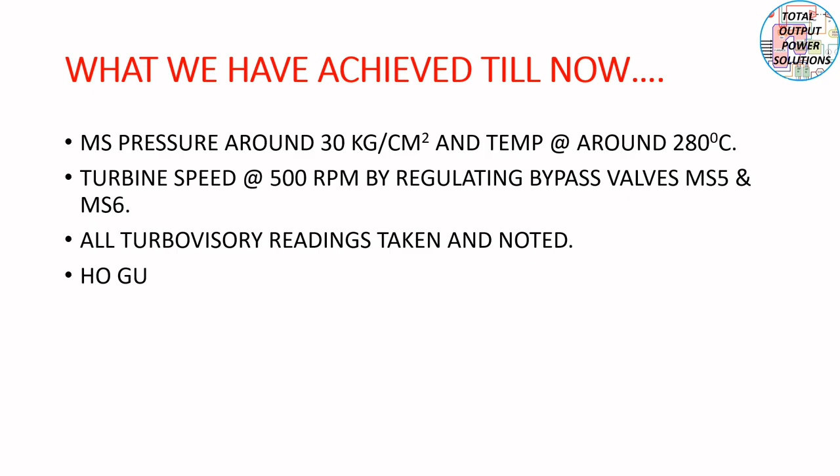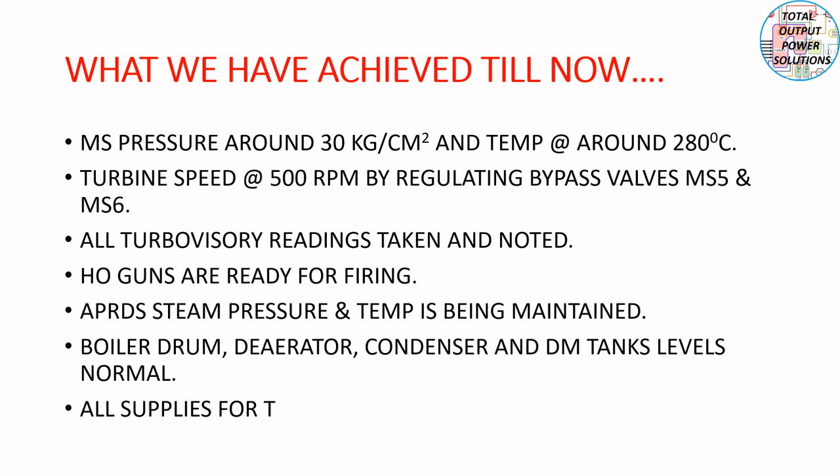Now all turbovisory readings have been taken and noted. The heavy oil guns are now ready for firing. The auxiliary PRDS steam pressure and temperature is being maintained. We constantly check this. Then boiler drum, deaerator, condenser and DM tank levels are normal. Now all the supplies for the CHP auxiliaries also are to be made ready, as we are going to take the CHP in service immediately after rolling.

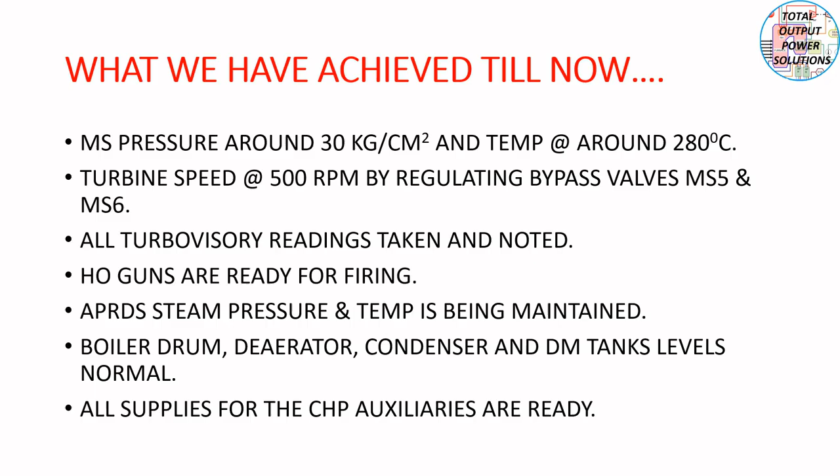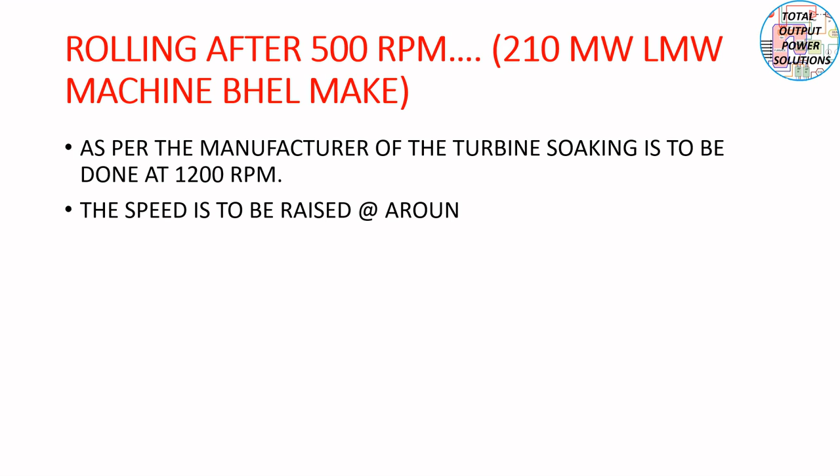The rolling after 500 rpm, we are doing it for 210 megawatt LMW machine by BHEL. As per the manufacturer of the turbine, the soaking is to be done at 1200 rpm. The speed is to be raised at around 40 to 50 rpm per minute. The critical speeds are at 1585, 1881, 2017 and 2489 rpm. Hence, we are not supposed to stop at these speeds and pass them over quickly. You can observe the eccentricity and vibrations at critical speeds.

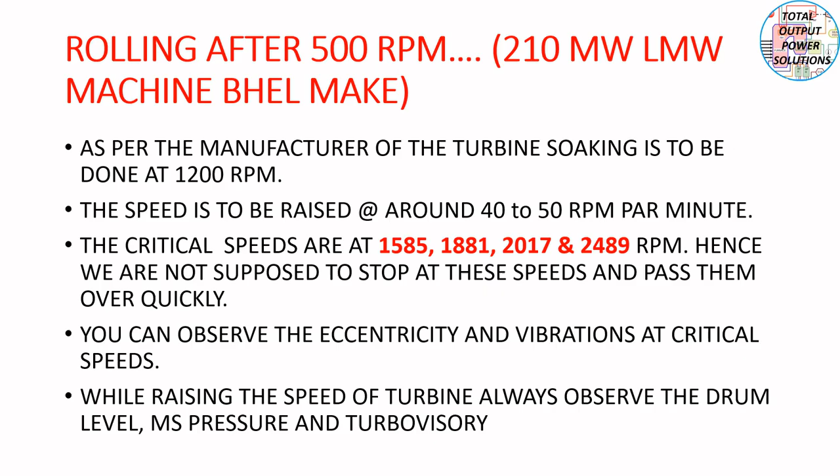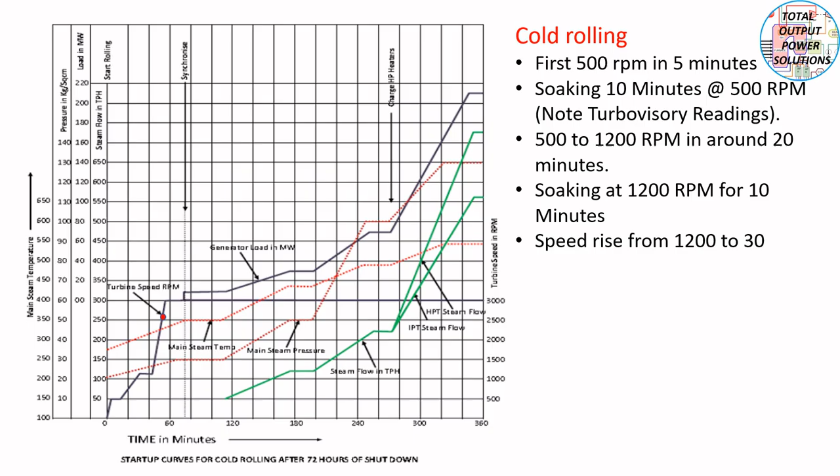While raising the speed of the turbine, always observe the drum level, boiler drum level, main steam pressure and the turbovisory, specifically eccentricity and axial shift. The diagram as per the chart that has been supplied by BHEL, the manufacturer, for cold rolling is something like this. You can see here the first 500 rpm you have to raise in just 5 minutes. Then there is a soaking time of 10 minutes approximately. This 10 minutes is generally for taking turbovisory readings at 500 rpm.

Then you can move on from 500 to 1200 rpm in around 20 minutes. Then again we will be soaking the turbine at 1200 rpm for around 10 minutes. It will run continuously on 1200 rpm. The speed rise from 1200 to 3000 rpm, we are raising the speed directly, and we are not stopping at critical speeds. The critical speeds are 1585, 1881, 2017 and 2489. This we are doing in 10 minutes only.

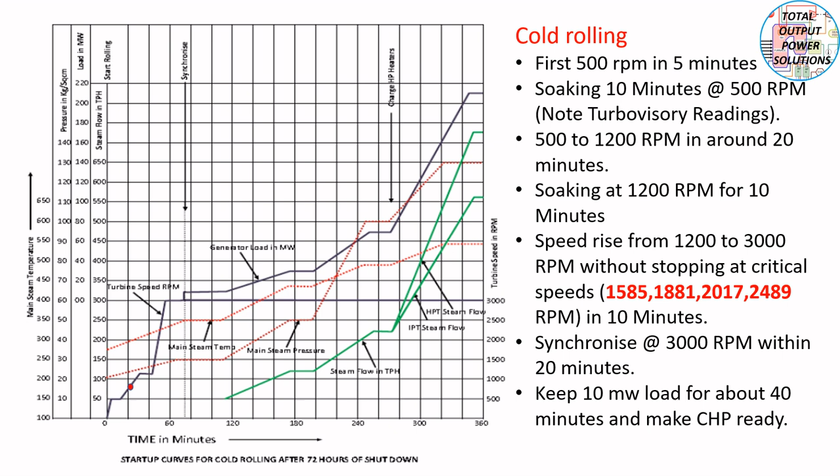Then synchronize the unit at 3000 rpm within 20 minutes. After getting the speed of 3000, you should synchronize it within 20 minutes, lesser than that maybe. Keep the 10 megawatt load for about 40 minutes, and till that time make the CHP ready and other things also ready for taking the load further. So let us now start the simulator operations. In this total operations, we are going to take up to 10 megawatt load, and further CHP loading we will be doing in later videos.

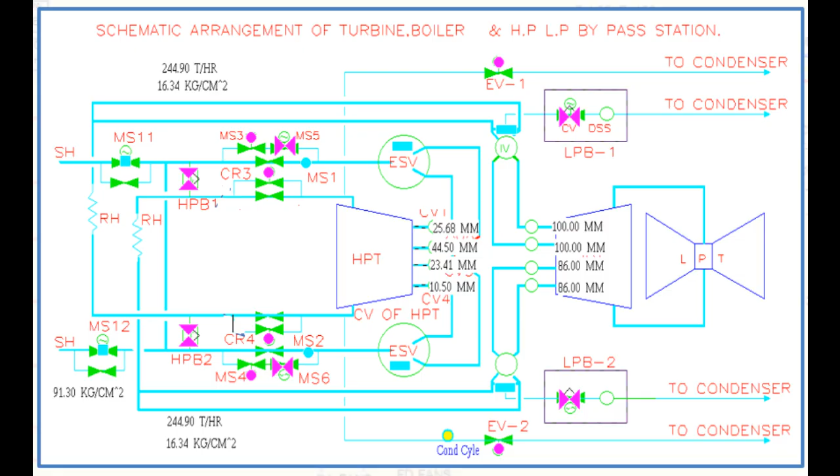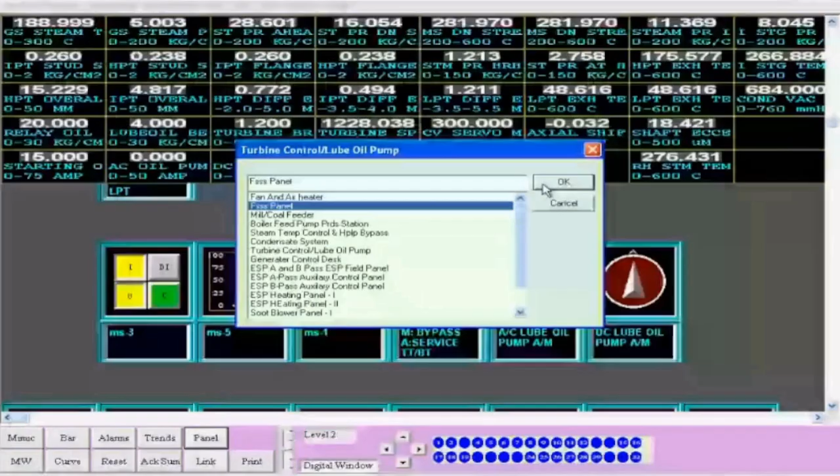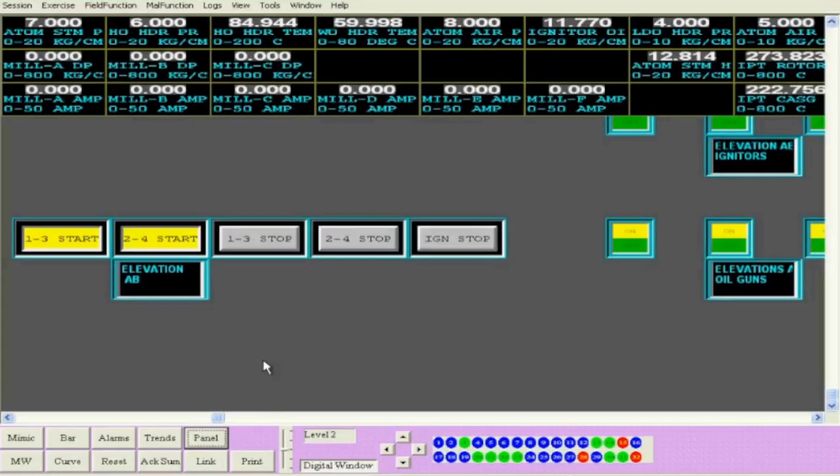Yes, friends, we have already started rolling, and after stopping at 500 rpm for 10 minutes and taking down the readings, we have rolled the unit further up to 1200 rpm. So we start from 1200 rpm and further. So we have to open the MS valves, MS5 and 6, and at the same time we have to watch the pressure and temperature of the main steam. Main steam pressure should not go down. We see that it is going down, so we have taken support: there were 2 guns in service, so we have started 2 more heavy oil guns so that the pressure will not come down.

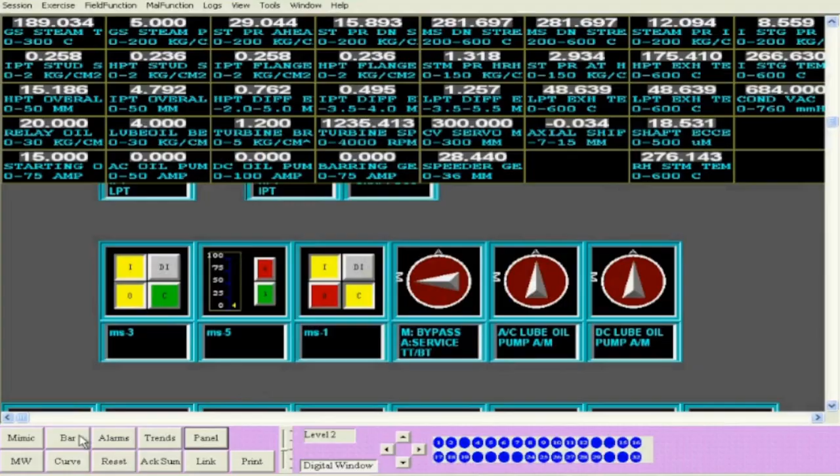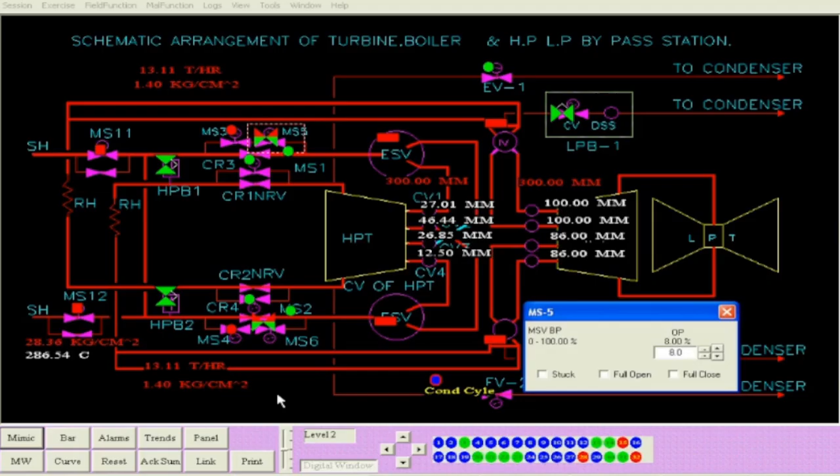Now we go to the turbine control panel, and there we increase the RPM. We can increase it from the mimic also. MS5 and 6 can be operated from the mimic. So we open it slightly so that the speed will increase. The pressure just now is 28.36 and we are now increasing MS5 and 6. So that will increase the RPM. Now you see that the RPM is increasing.

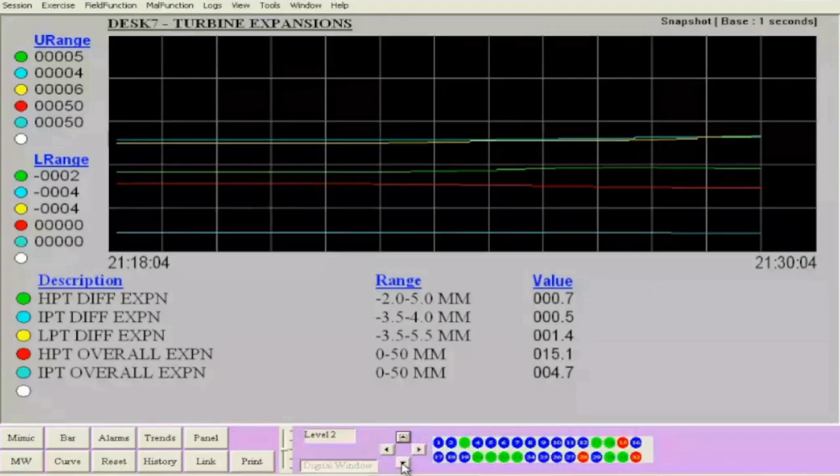It is 1303, 1304, 1305 like that, and as explained, the RPM should not be increased beyond 50 RPM per minute. So below that should be the rate of increase in the RPM. At the same time, we will check the HPT differential expansions and HPT, IPT, then the turbo speed, CVSM, speeder gear position, eccentricity, all these readings on the trends also, and on the panel also we are able to see the differential expansions as well as the axial shift and shaft eccentricity.

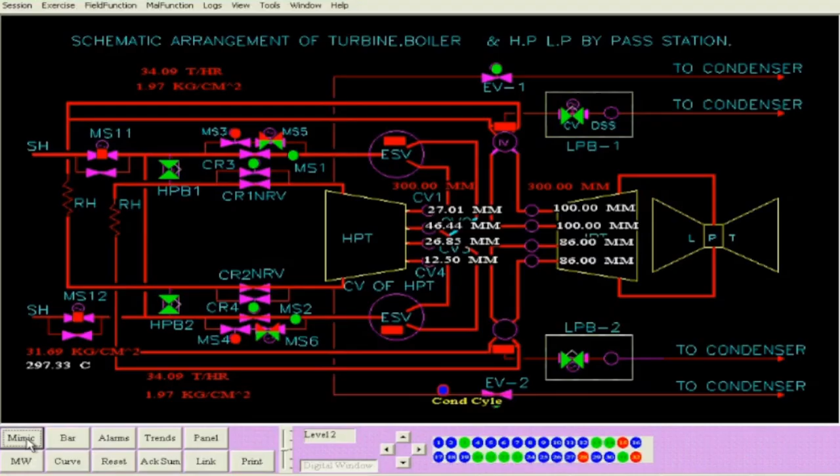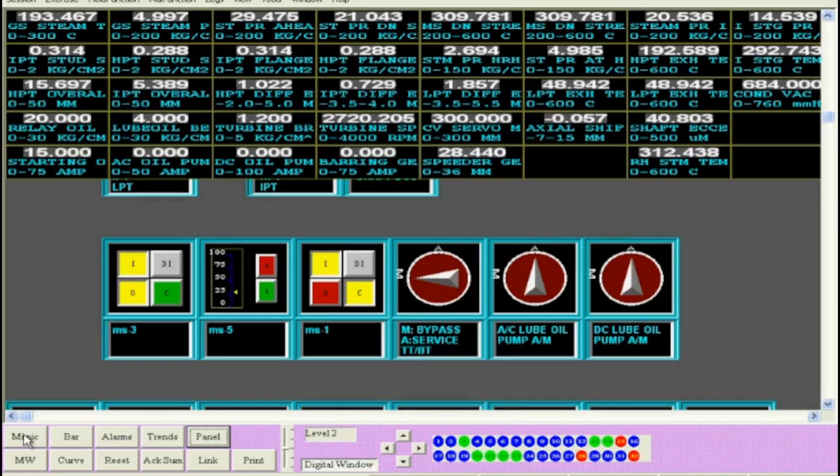Now you can see you have the same experience in case of the other critical speeds also. We have passed over one critical speed, the second critical speed, and maybe the third critical speed, because it has already crossed that speed. At the critical speed you will also be able to hear the jerks, the vibration and the eccentricity on the floor also, on the turbine floor.

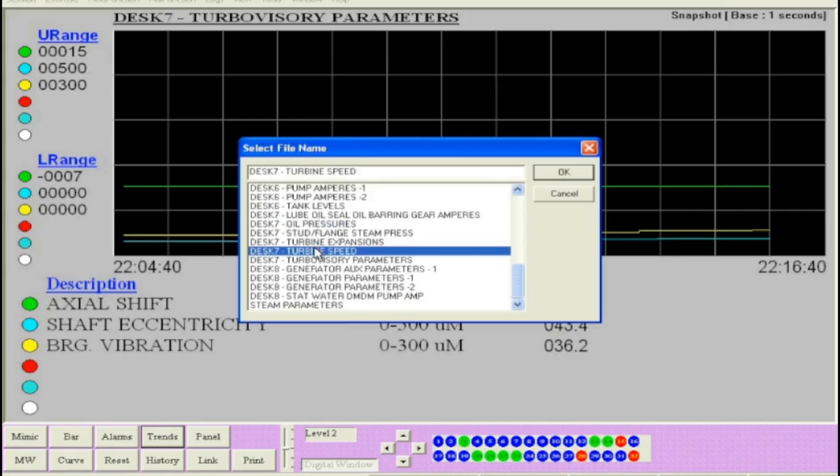Now we have reached the speed of 2700. At 2800 speed, the starting oil pump, which is running at 15 amperes, you will see that when the speed reaches 2800 and more, the amperes will come down. It was 15, now it has come down to 13.5 as the speed has reached 2869.9. This also can be observed. The shaft eccentricity and bearing vibrations are also slightly increasing, so you have to keep a close watch on that.

Now the speed is 2900 and the opening of MS5 and 6 is around 25%. Now at this time the CVSM is full open. The CVSM is 300 mm, as you are seeing. As the speed approaches 3000 it will take command, and you see we are raising MS5 and 6 further. The speed is quietly rising. After it reaches 3000 RPM the CVSM will come down.

Now here we see in the eccentricity one more critical speed has been crossed. Now we again open MS5 and 6 so that the speed goes on increasing. It is around 29%, and the speed is approaching 3000. We go to the panel again and see. No, it is still 2954.

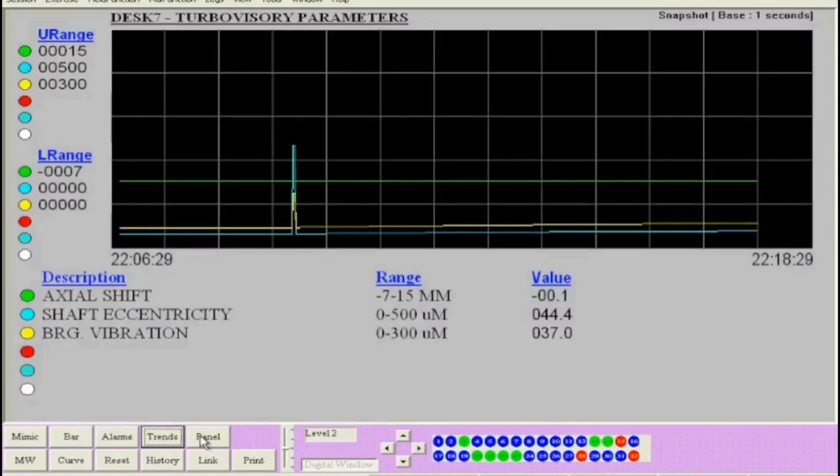Now once the speed goes beyond 3000, the CVSM takes over, and you can see in the mimic also that the control valves have started shutting down. The speed has still not reached 3000 and the CVSM is still 300 mm. Now the turbine speed is 3008, and you see here the CVSM is slightly reduced from 300 to 288 or so. Here in the mimic also you are able to see that.

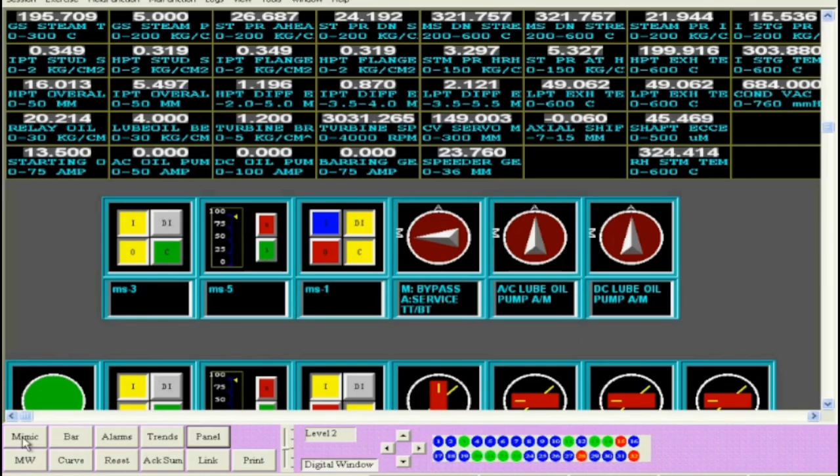Now when the CVSM takes over the control of speed at 3000, we then open MS5 and 6 fully, and then we open MS1 and 2. So now you see the speed is 3031 or so, and the CVSM is only 148. At this stage we open MS1 and 2. We put it on the interlock, we open, and then again put it on interlock.

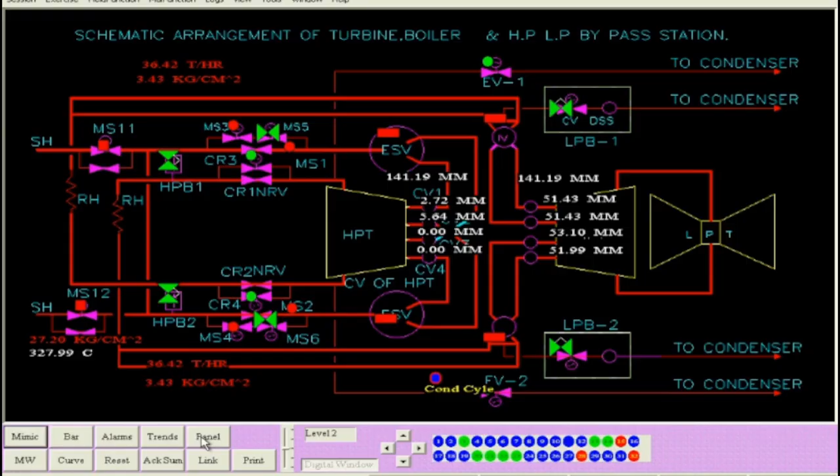Now here there has been a mistake. You should have opened MS2 also, but here you are closing MS5 and 6. That should not happen. First MS1 and 2 should be opened, and only then can MS5 and 6 be closed. Now MS5 and 6 have been closed, and the main steam flow is now through the main steam line valves MS1 and MS2 into the HPT and IPT through the CV, and the CV is controlling the speed. The speed has come down to 3007, and the CVSM is 141, 142. It is maintaining that speed.

Now we go to the generator panel, and in the generator panel we first make the field breaker on. You see the indication will also appear there that the field breaker is on. Now we will make the field flashing supply on, so that the supply is extended to the field. When we make the field flashing supply on, you will see some voltage generated. So this is the field flashing breaker, and we are giving the field flashing supply.

You see that the generating voltage has started developing. So it is 1.1 kV, and it will go to around 7 to 8 kV, and then you can manually increase the potentiometer so that it is further increased to 15.75. So we are going to increase the voltage up to 15.7 manually. We are increasing it manually, and now you see that there is a voltage error, that is 9.4.

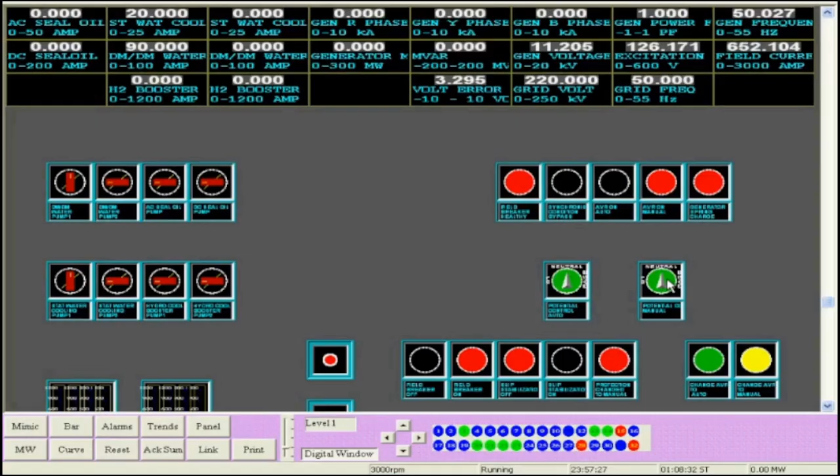At the same time, you can go to the turbine control panel also. There you can check whether the speed is being maintained or not. But generally, once the governor takes over, the speed will be maintained. Now it is 11.279, 11 kV, 11.7, 12 kV. Then here you can see the generating frequency.

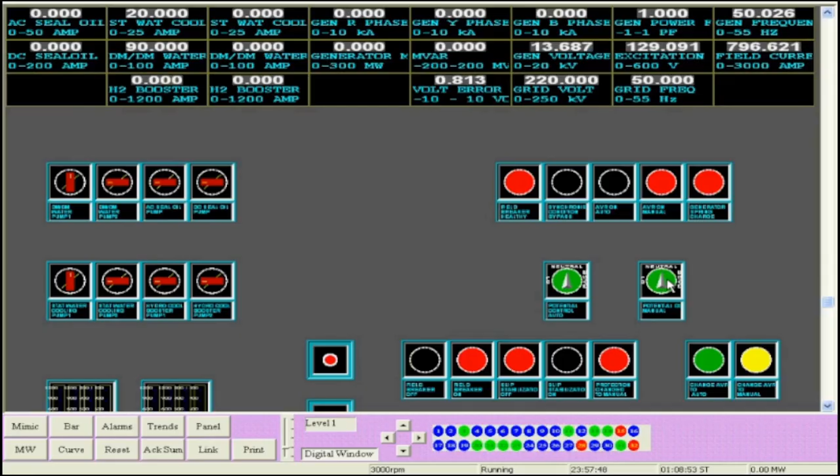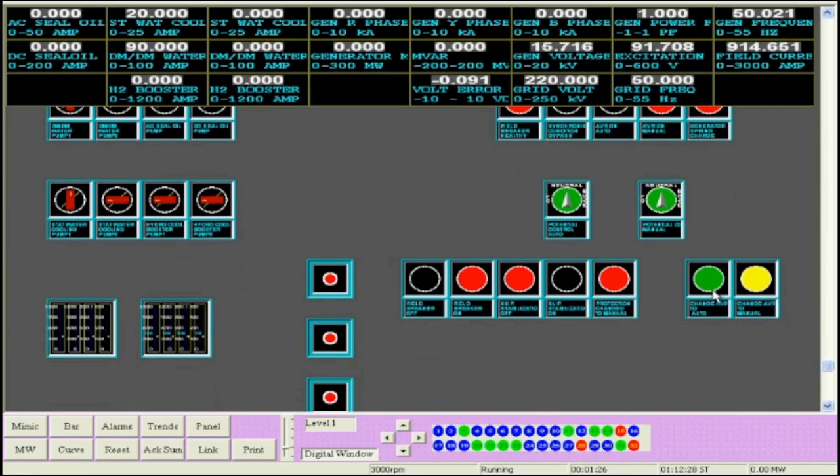The generating frequency is 50.027, meaning the speed is around 3000 RPM, 3007 or 8, slightly more than the grid frequency. The grid frequency is also there, it is 50. Now it is 15.7, so the voltage error is minus 0.09. So we can put the AVR on auto. We put the AVR on auto here from this button.

The signal will also be there. A red light will glow showing that the AVR is on auto. So we have put the AVR on auto. Now you can go to the synchronizing panel. The voltage is there, and the generating frequency is also there, slightly more than the grid frequency.

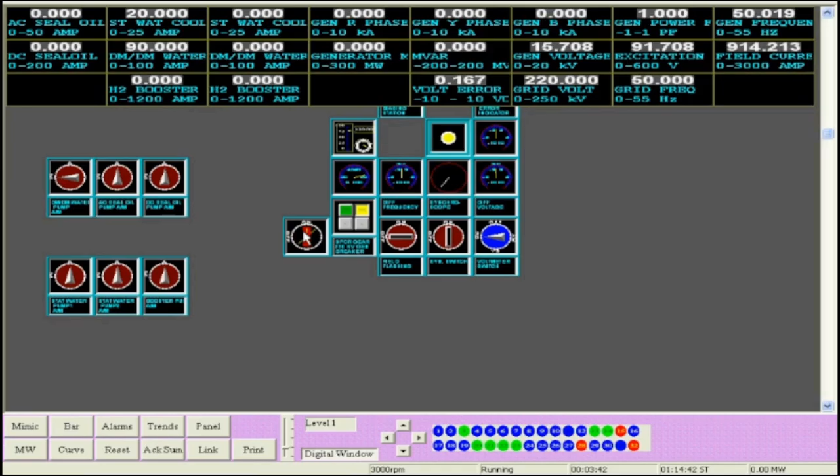So we can turn the synchroscope on at this point. This is the synchroscope. When we turn the synchroscope on, you will see that the pointer will be moving slowly in a clockwise direction, because the turbine speed is more than 3000. At the same time, we will put the generator breaker in a position such that on giving a command it will close.

There is a yellow light just above the synchroscope that shows the synchronizing. If the synchronizing condition is okay, it will glow red. Generally at 11:55 the light will be red, so at 11:55 you can close the breaker. Now it is approximately at the 9 o'clock position, then 9:10. So at 11:55 you can close the breaker.

As soon as you close the breaker you can see the generator megawatt also. Now it is a red light, meaning you can close the breaker now. So we are closing the breaker. Yes, we have closed the breaker, and you see the generator megawatt has started showing. It is 0.362 or something.

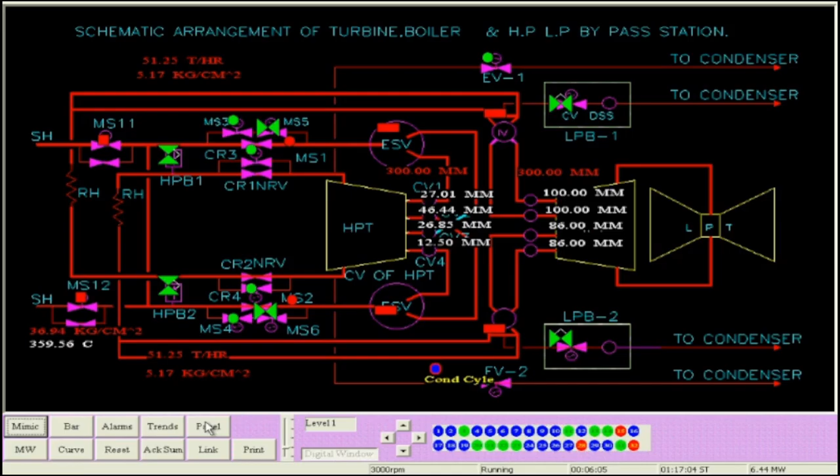Now we will increase the speeder gear a little bit so that the load will be there. We check the pressure here also. The main steam pressure is 13.11. So slowly we will load the generator and the turbine, and slowly we open the CVSM. Now the CVSM has been opened around fully, and we can now turn the synchroscope off as the unit has been synchronized.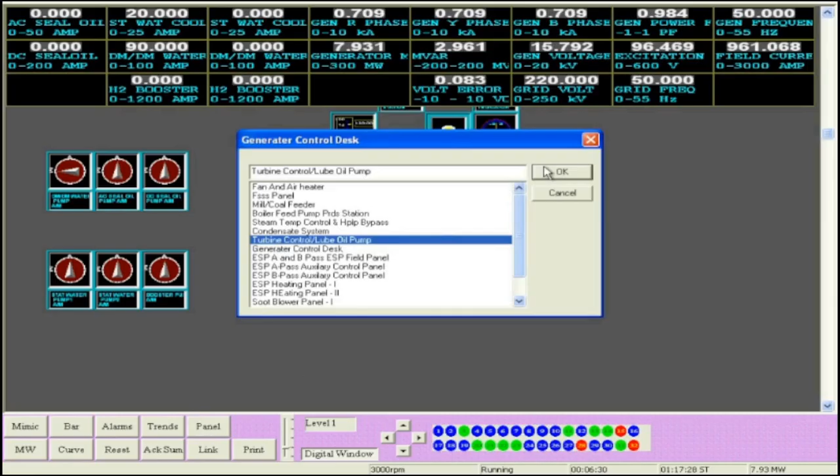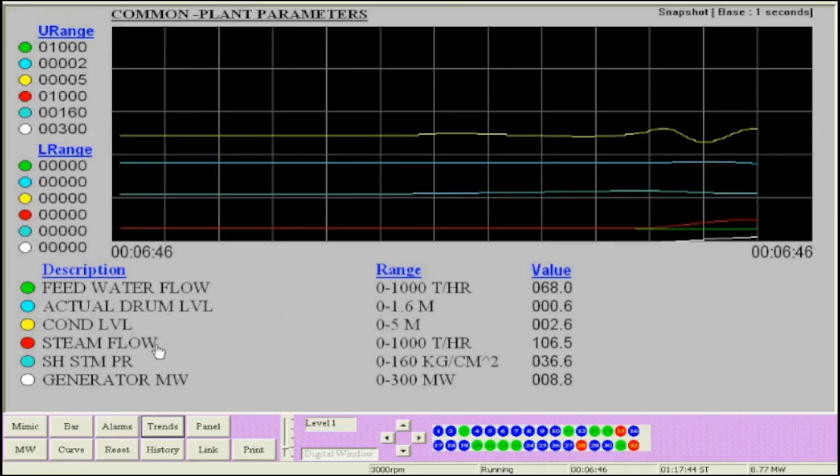The field flashing supply we can also turn off, and you will see that the generator MW has risen to 7.931. That will be shown in the bottom right-hand corner also. Now you can check all the axial shift, eccentricity, vibrations, etc. Then go to the plant common parameters. There you can see the actual drum level, condenser level, and all this, whether they are correct or not.

Now the load has reached around 11 megawatt. So we will keep this load for around 15 to 20 minutes, and then we will load further. So thank you very much.